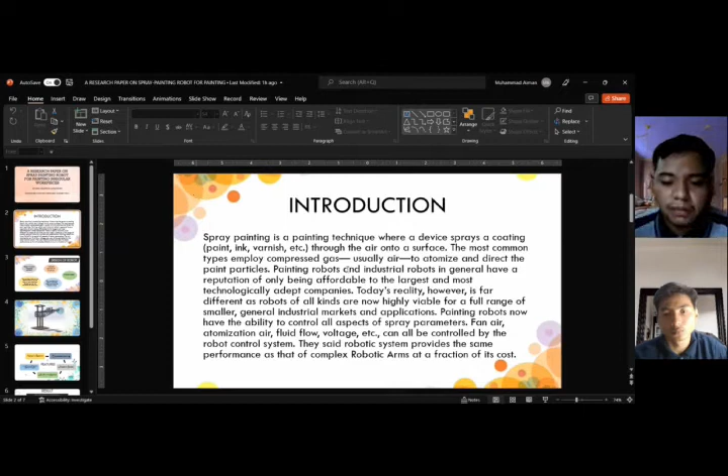Painting robots now have the ability to control all aspects of spray parameters - fan air, atomization air, fluid flow, voltage, and others - all controlled by the robot control system. The robotic system provides the same performance as a complex robotic arm at a fraction of its cost.

For this robot in the research, the design has a base which is a 4-bar diamond pattern as a support. Then it has an inclined portion of structure. It also has the carriage that slides on the base structure with the help of roller bearings.

The guideways are for the movement of the spray gun. The gun was mounted on a mount which has a slider and also an encoder motor. It is a 4-axis robot.

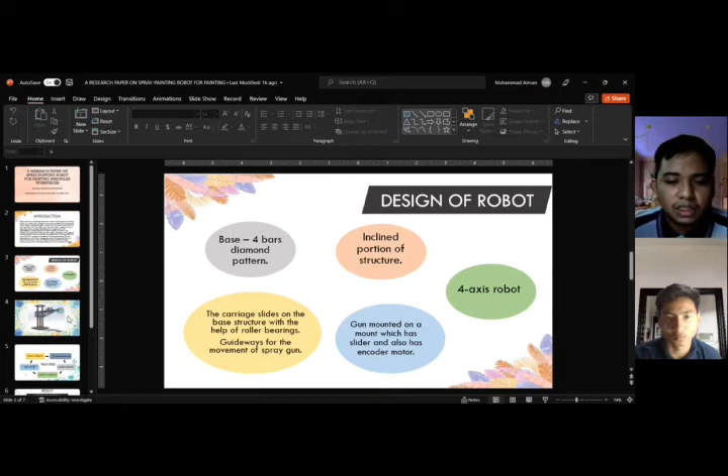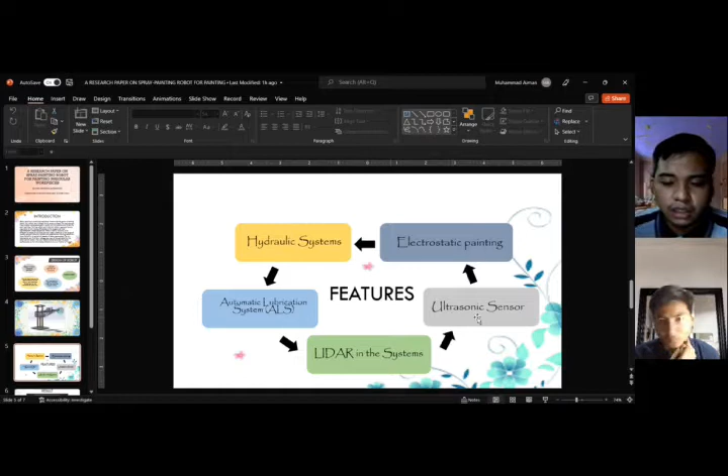Then for the features of the robot, according to the research paper, it has a hydraulic system, auto lubrication system (ALS), LiDAR in the system, ultrasonic sensor, and electrostatic painting.

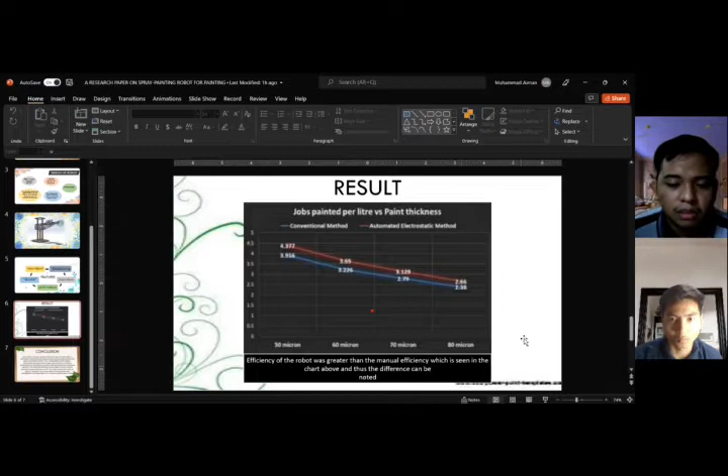For the result, the efficiency of the robot was greater than the manual efficiency, which is seen in the chart above, and thus the difference can be noted.

The conclusion is that automation increases operator efficiency. The need for skilled labor is eliminated. Implementation of electrostatic spray painting reduces the paint consumption by 9%.

Thus, it increases the profit margins. Electrostatic spray painting for large scale production increases productivity and consistency in quality, reducing rework and minimizing rejection. Accurate path planning of spray pattern helps to further eliminate double coats and run-offs.

The system paints only when an object is detected. The sensor detects the boundaries and topographies, and depending on it, can paint multiple types of axles.

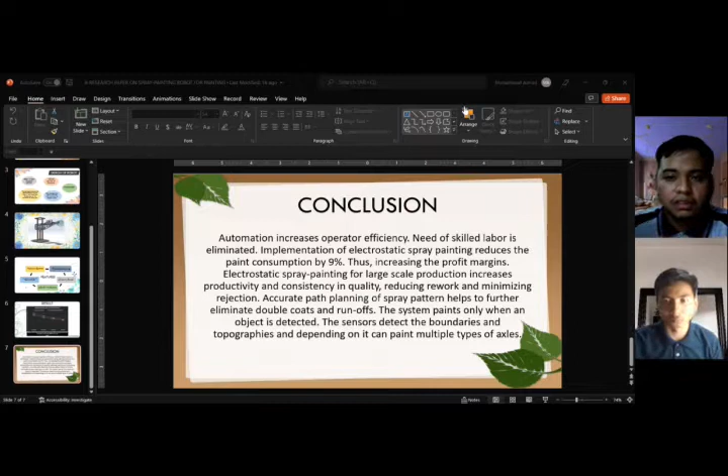That's all from me. Now I will give this to Shukri for the next of his research presentation.

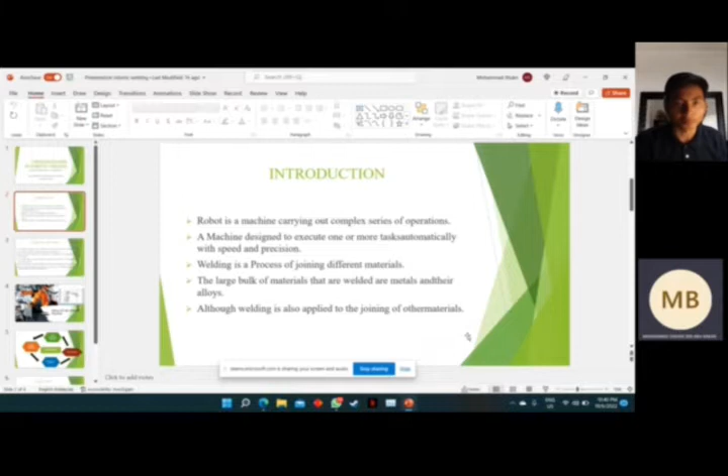For this, it is robot arc welding - a technique in which metals are welded using the heat generated by an electric arc.

Second, the working condition is typically unpleasant and hazardous. Third, the arc from the welding process emits ultraviolet radiation which is harmful to human vision. As a result, welders are required to wear eye protection in the form of a welding helmet with a dark window.

Sparks and smoke are generated during the process, posing a potential threat to operators because of the hazard for human workers in continuous welding. It is logical to consider industrial robots for the purpose.

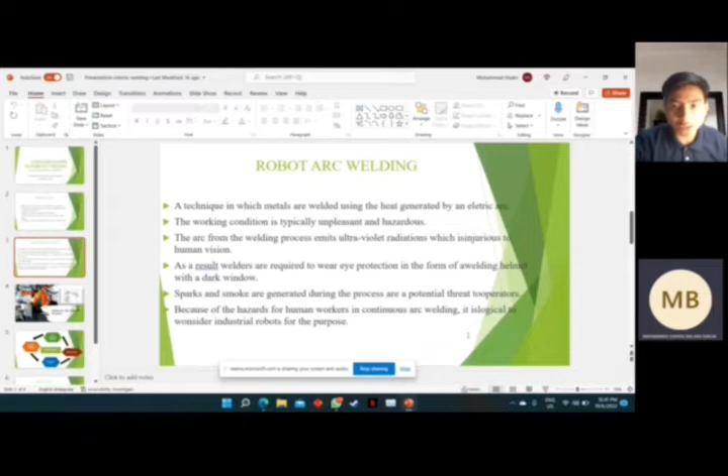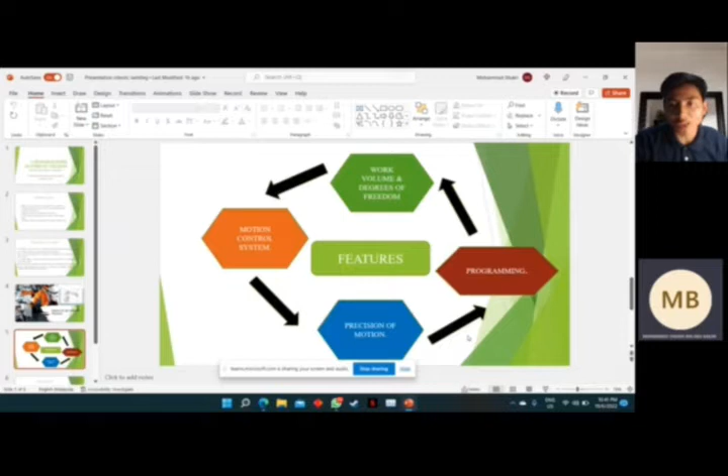So the conclusion for arc robotic welding: a properly applied robot can accomplish routine and undesirable work better than a human at lower cost. As technology advances and more people learn how to use robots, the robotics market will grow at a rate approaching the growth of the computer market over the past 30 years.

There is also reason to believe that the automation of work through robotics will lead to substantially increased productivity, and that this productivity increase year by year will permit humans to engage in activities that are cultural and recreational. Not only will robotics improve our standard of living, it will also improve our quality of life.

Next, I want to pass it to Usama bin Zulkifli.

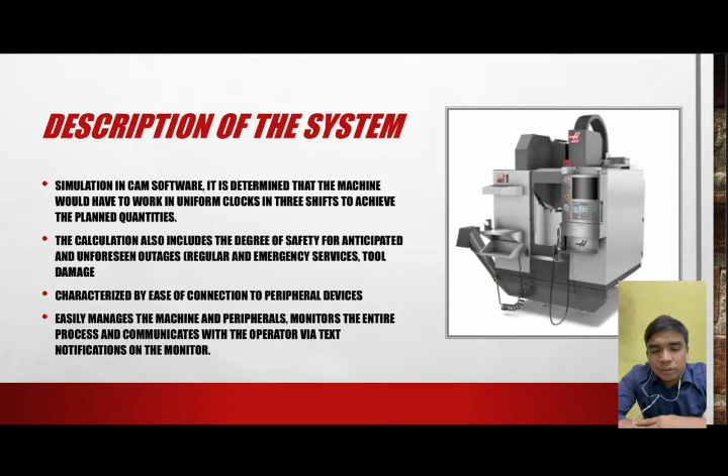The robot and CNC system is characterized by ease of connection to peripheral hardware devices. The system also makes it easy to manage and monitor the entire process, and communicate with the operator via text or notifications on the monitor.

Next, in this research paper we have an automatic clamping system and robot cell, which is the main machine using robotics with the CNC. In this machine, a clamping head with an elastic sleeve installed on the turntable is required to clamp a 25 diameter workpiece. The main problem with this machine is the part.

This is because of the load capacity of the turntable during index rotation and during simultaneous rotation. This system also solves another problem, which is the deformation of the workpiece due to different clamping forces.

A universal robot cell is installed for manipulating the piece and servicing the 5-axis CNC machine, which is equipped in this way.

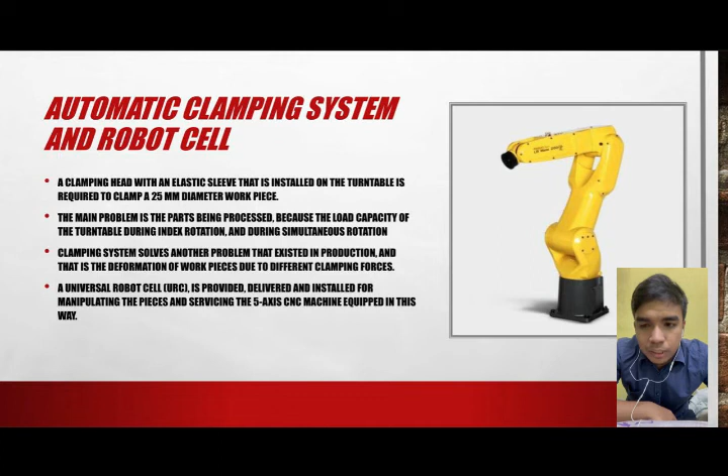Finally, testing the system: in this research they tested the machine with the CNC robotic system using Autodesk drawings. After completing a test series of 100 pieces, the autonomous system was put into operation in 3 shifts, 7 days a week.

Finally, they plan to further upgrade the system with a 3D area sensor in order to save the time needed to pack the preparation on special pallets from which the robot takes parts.

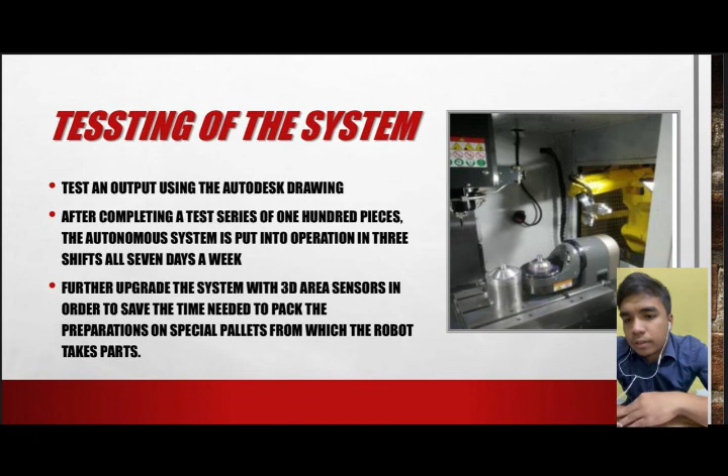For the conclusion, it can be concluded that today it is impossible to make production that is sustainable and competitive on the global market without the application of high technology and automation. The increasing variety of products that the market needs imposes on manufacturers the requirement of high adaptability of production systems, which can be achieved through the introduction of flexible production systems composed of interoperating devices with variable architecture.

Finally, in the future we predict that we will encounter more flexible production cells managed by artificial intelligence that will be able to learn, and human presence will be even less necessary, reduced only to assigning tasks. That's all from us. Thank you.